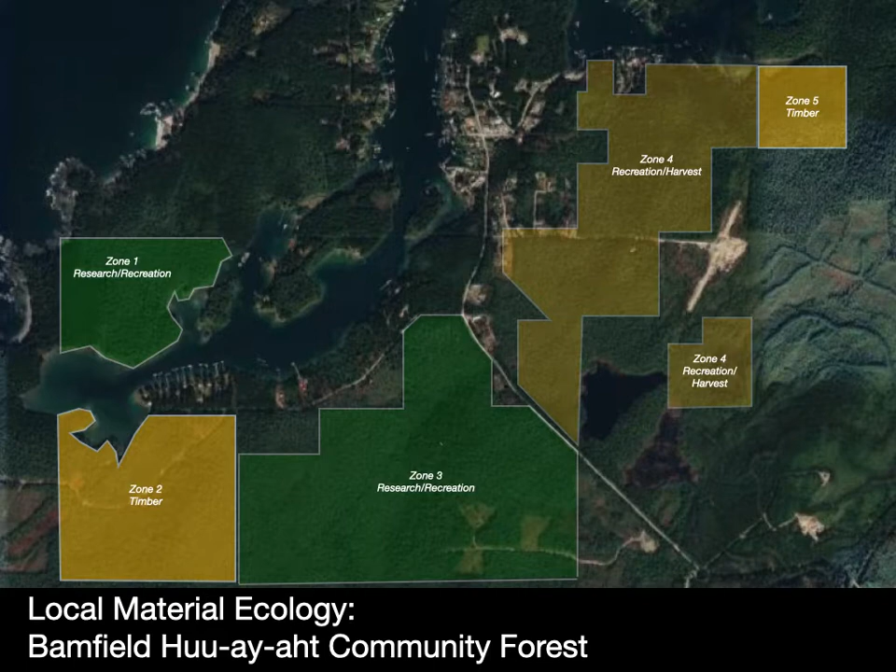As we think about the materials for the studio, drawn from this community forest, it's an opportunity to rethink some forestry techniques - I'll get into what that means in the context of the studio in a moment. The site for the studio you can see represented here.

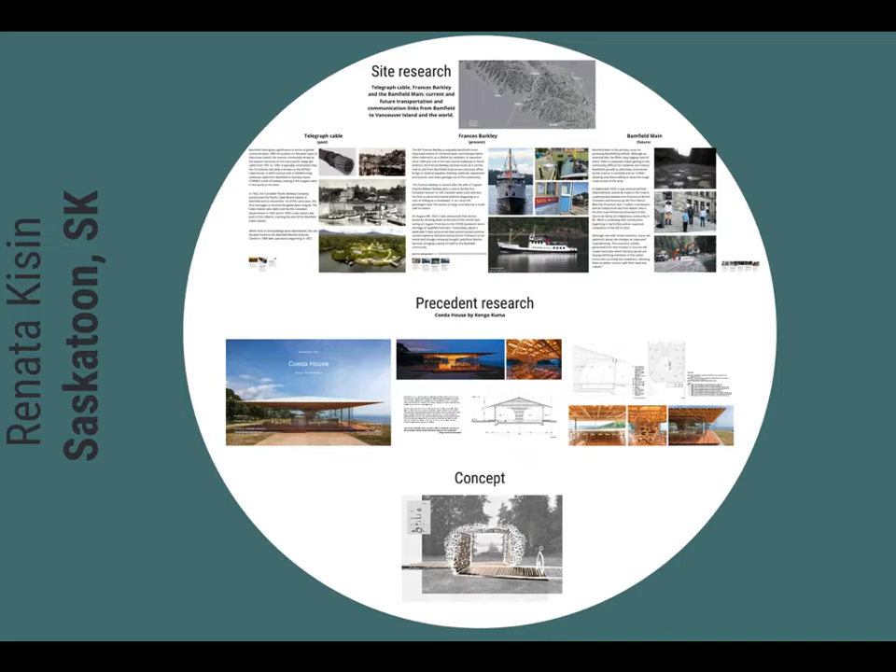I thought it would be useful to see what the studio engaged in last year, as it will follow a somewhat similar course. It begins with precedent research done on an individual level, and we'll build a collaborative site model.

We'll have an optional site visit to Bamfield, COVID permitting, at the end of September, and this will be partially funded by the Bamfield Public Affairs as well as the Teaching and Learning Enhancement Fund from UBC.

We'll get around on boats - it's very instructive to be there on the site. We'll meet with community members and stakeholders.

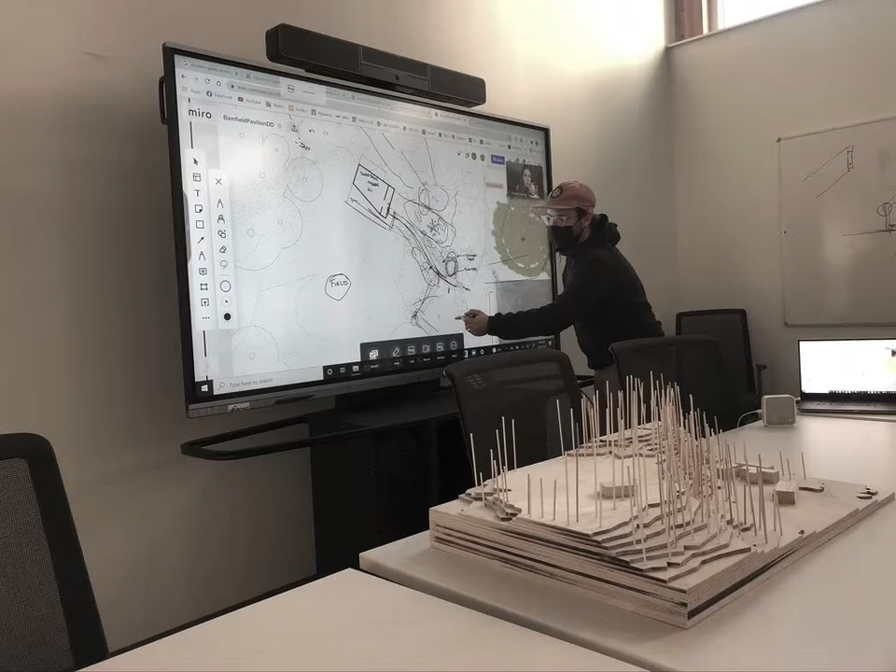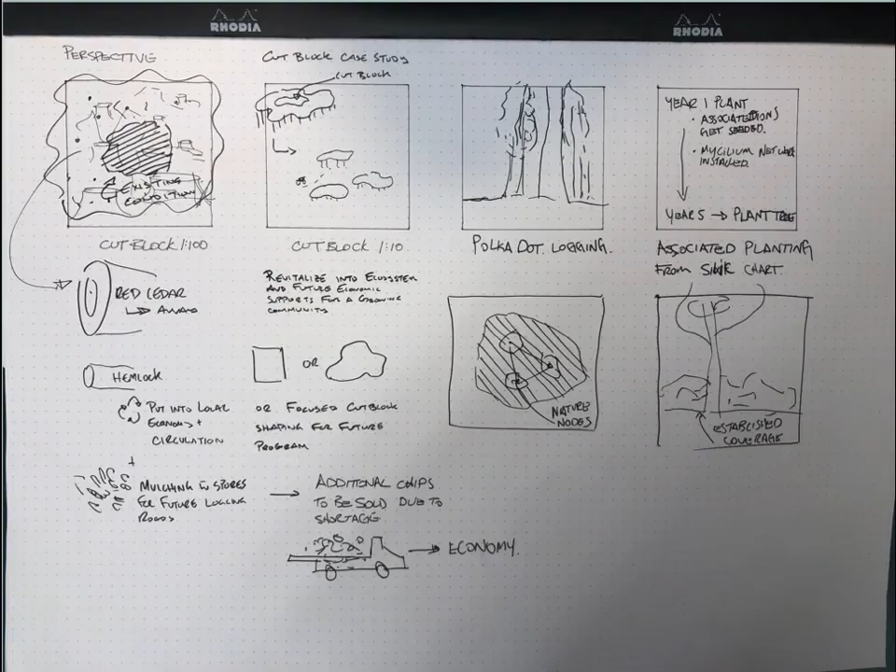We'll also be thinking through forestry techniques with the help of Suzanne Simard, a global leader in sustainable forestry, who is also on the faculty of forestry here at UBC. She's agreed to have a role in the studio with her doctoral students, and we'll be working in Sketch, digital models, with a lot of collaborative work.

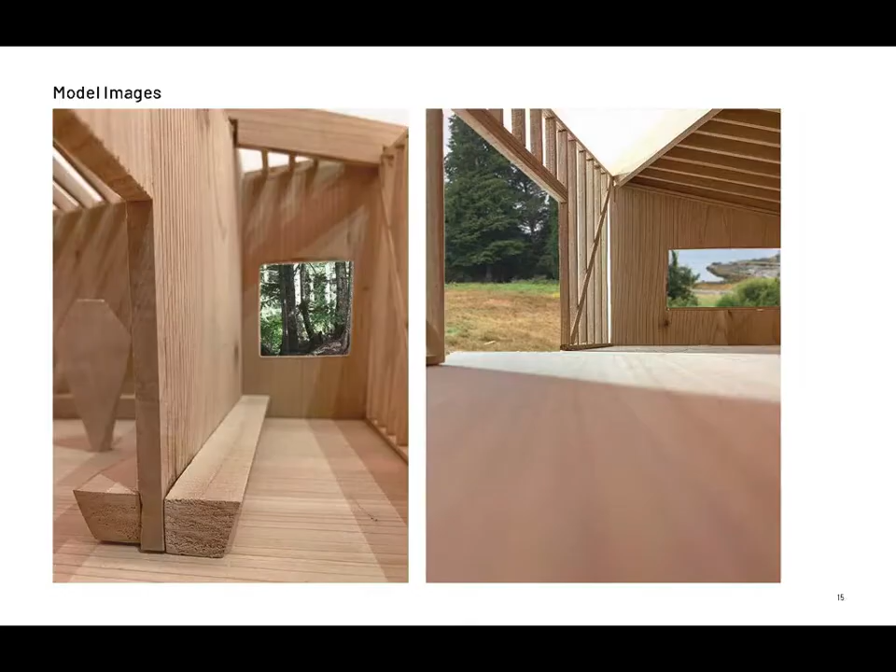Most of the work in the studio will be undertaken with small teams. I'm a fan of mock-ups and model building at large scales, so we'll engage in those activities in the shop, along with hybrid representational techniques.

The end result will be to provide a set of documents that enable the community to construct what we're designing, so we'll get to a fairly detailed level. It's a great place to pick up some of those skills if you're interested in that.

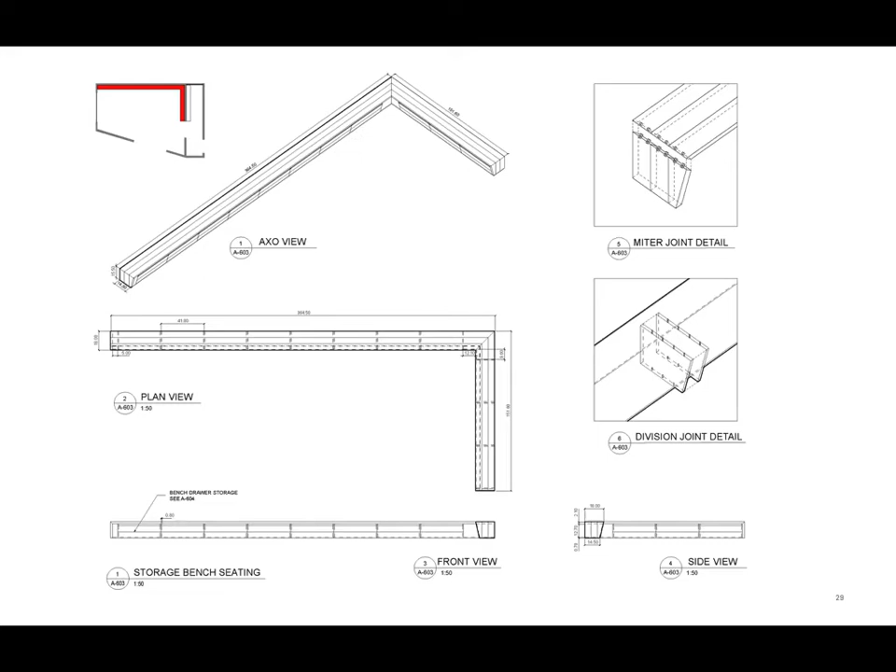We'll get down to a very fine scale - this was some furniture for the pavilion I mentioned. This was the final construction set they produced by the end of term, which even got down to the level of material takeoffs to enable the community to run some costing exercises.

So it really will be a soup-to-nuts approach to these critical pieces of community infrastructure, drawing on local material ecologies. I hope to see you in the fall - it should be a really interesting term. Thank you.